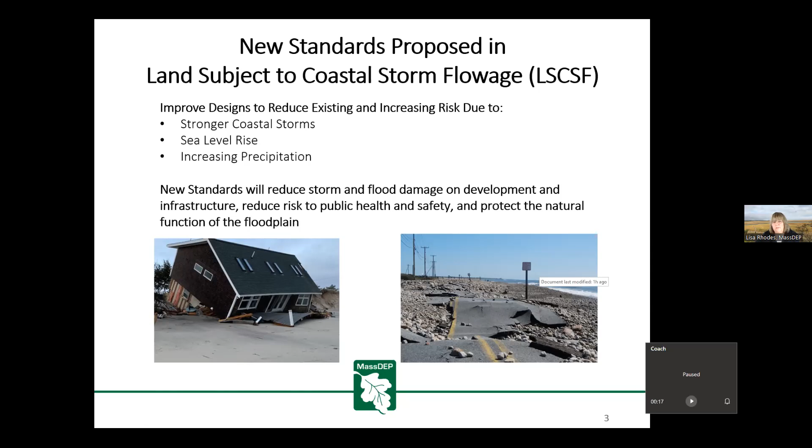And so, many of you know that we have been working on these standards for a number of years, even though land subject to coastal storm flowage has been a protected Wetlands Protection Act resource area since the very beginning. But we've never had specific standards for this resource area. And we've learned over these years that the importance of having these standards is not just for environmental reasons, but it's also important for economic reasons.

And this was highlighted in a report in Commonwealth Magazine in October of 2022, where they discussed the big three credit rating agencies, how they gave Massachusetts mostly good ratings, but noted that there's a counterweight in the state's vulnerability to coastal storms and flooding. And specifically, the S&P rating in 2022 noted that Massachusetts environmental risks were moderately negative in the credit rating analysis because of our coastal exposure.

Specifically in the combined Boston and Cape Cod area, exposing the state to significant economic disruption following a high impact event. So implementing strong and new standards in land subject to coastal storm flowage not only makes environmental sense, but it makes economic sense, for a strong Massachusetts in general.

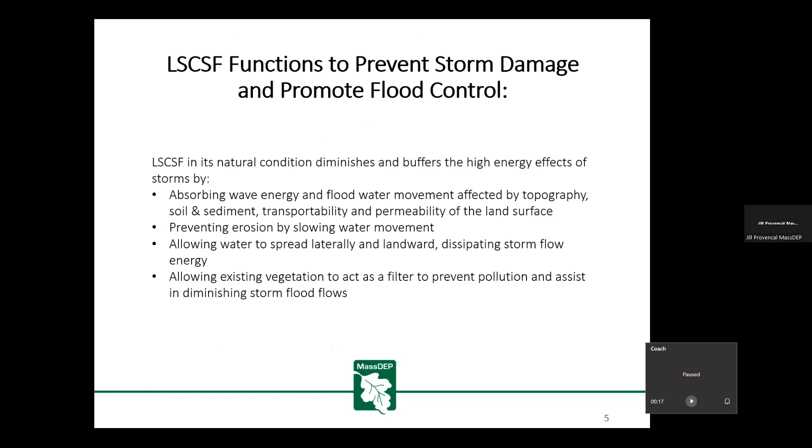So within land subject to coastal storm flowage, we have several FEMA flood zones. I think you can see my cursor. So the velocity zone, or V zone, is also known as the coastal high hazard area. And the V zone boundaries are determined by reference to the currently effective or preliminary FIRM map prepared by FEMA. These areas are subject to high velocity wave action from storms and have projected wave heights of 3 feet or greater, or at least 3 feet of runup.

Landward of the velocity zone is the MoWA, or the area of moderate wave action, also considered a high hazard area of the A zone. These areas experience wave heights between 1.5 feet and 3 feet, storm surge, and wave runup. Then landward of the MoWA is the MiWA, or area of minimal wave action, also located within the A zone. And this area is considered the lower hazard portion of the A zone and is subject to wave heights less than 1.5 feet during the 1% annual chance flood.

Then you'll see this boundary here. And this is the boundary between the MoWA and the MiWA. It's called the LiMWA, or limit of moderate wave action. Just a note that the complete up-to-date LiMWA lines are only available through the FEMA Flood Map Service Center as part of the National Flood Hazard Layer. They are not shown on MassGIS or other state viewers. And then landward of the MiWA is the X zone, and these areas are currently not located within the FEMA 1% chance floodplain.

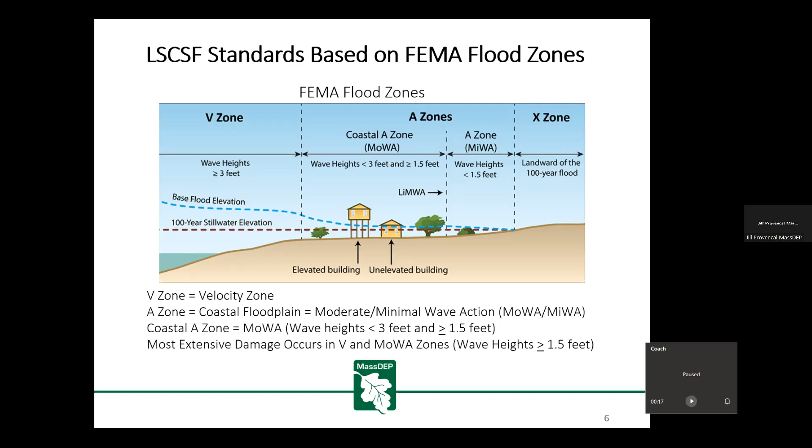So learning from past storms. Areas along the coast of Massachusetts consist primarily of protected coastal reservations, natural wetland resource areas, and rural to highly urbanized development. And in each of these areas, regardless of its present landscape, they are subject to erosion, scour, and damage from storm events.

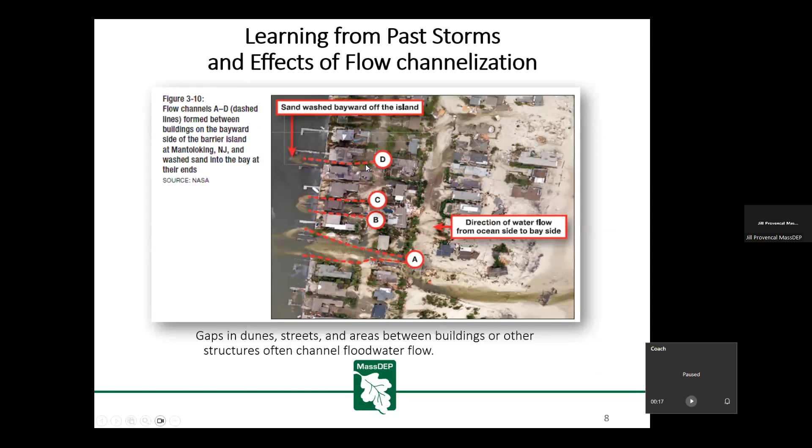So I'm going to refer back to this as I describe what we're seeing here. So in certain areas, the MAT found that flow channelization tends to be highly localized, and changes in elevation can facilitate flow channelization. So in this figure, and this is from the Hurricane Sandy MAT report, they identified flow paths A, B, C, and D. So the flow channel A, this path here, resulted in washing this house into the bay. And then flow channels B through here, C, and D, resulted in undermining foundations and causing collapses of homes.

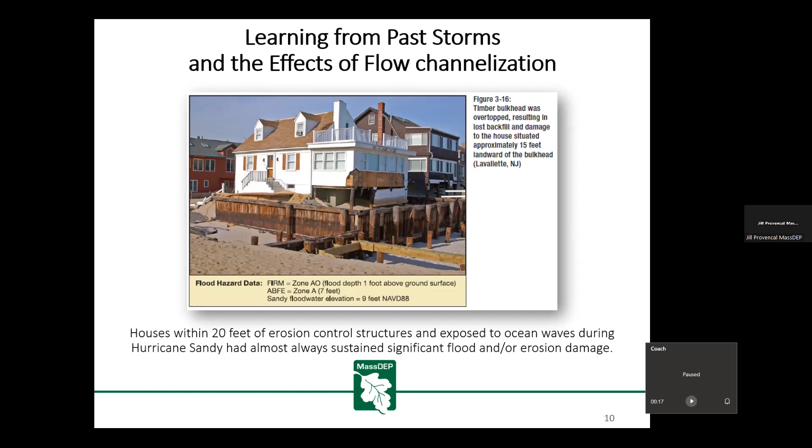The Hurricane Sandy MAT also found that buildings within 20 feet of erosion control structures exposed to ocean waves almost always sustained significant flood and/or erosion damage. Other evaluations include, but aren't limited to, this is the federal flood insurance claim map, for which we can see on the landscape areas of repetitive damage from storm events.

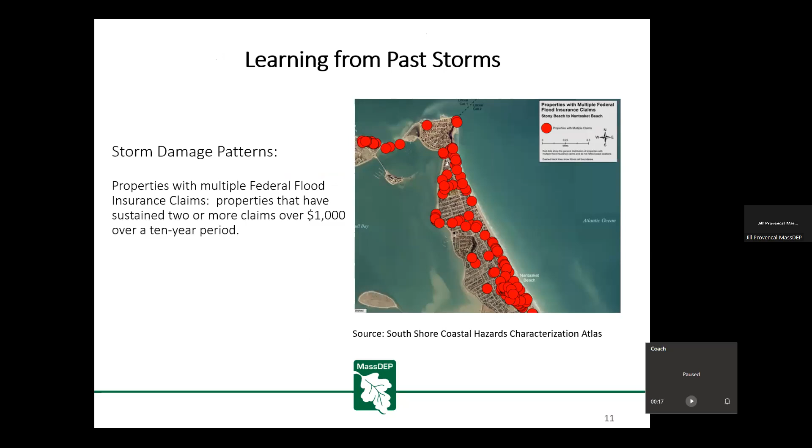So I guess for me, in closing, observations, again, including but not limited to those documented by FEMA, MassDEP, and through our Mass Coastal Storm team, who's been a little bit busy the last few weeks going out there and doing assessments, is reshaping really how we think about development and redevelopment within LSCSF.

And we are hopeful that through these draft regulations, we can utilize what we have learned and adapt and change past practices within LSCSF and focus on utilizing this resource area and other wetland resource areas to our advantage by restoring and preserving their capacity to provide storm damage prevention and flood control.

And now I'm going to pass it over to Pam Harvey. Thanks so much, Jill.

Yes, I'm going to begin with a walking tour of the proposed regulations at a very brisk pace, because we've got a lot to go through and we want to get to your questions. But I'm going to begin here with some sort of orientation to how the regulations work.

We have many people living in land subject to coastal storm flowage, businesses; there's development already there. There's new development that may be proposed. So we tried to set up the regulations in a way that was going to be relatively easy to implement. So these are some considerations to think about when you're thinking about a project or how the regulations may apply to your site or within your town, because I know many of you may be with conservation commissions.

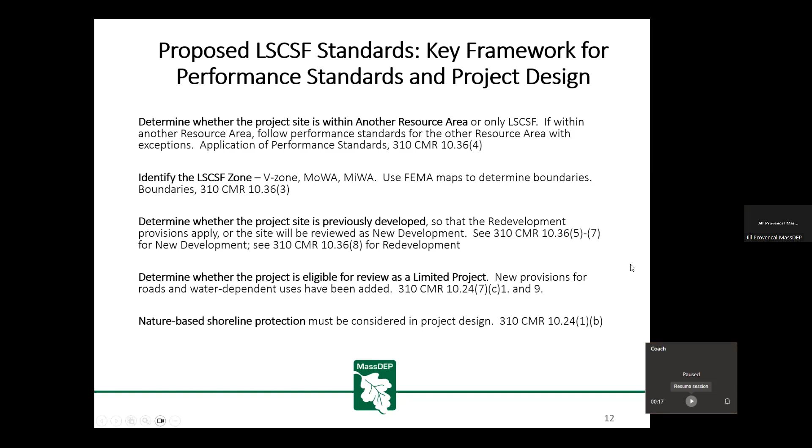Okay, all right. Turning to this central question of whether you're under the land subject to coastal storm flowage standards only, or whether there's another resource area, and how to sort that out. We're at 310 CMR 10.36 in the proposed section 4 in the proposed regulations, in case any of you have started to read them and digest them. So again, the general rule is that if it overlaps another resource area, you meet those, except for these important provisions.

There's a provision that addresses buildings: there's no new buildings in the velocity zone, even on open piles. And then in the moderate wave action zone, new buildings would have to be elevated under the land subject to coastal storm flowage standards, dune, bank, or the building code, whichever is higher. So there's a distinction there about buildings and building heights that would apply if you're in another resource area. For the moderate wave action zone, the building height would be base flood elevation plus an additional 2 feet, and there is a limited waiver clause for the additional 2 feet for very exceptional circumstances, but for the most part that will apply.

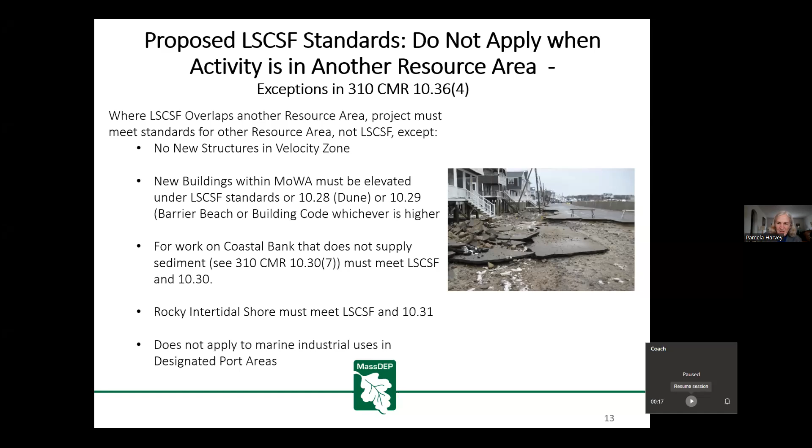And then finally, and not unimportantly, they do not apply to marine industrial uses, and that's a defined term. It's also a Chapter 91 term within designated port areas. Okay, next slide.

Okay, so just turning to the basic standards themselves. They're set up in a way that's very consistent with the other coastal resource areas, and inland areas too, with the same kind of format. There's a preamble, as you would expect, that describes some of the functions of land subject to coastal storm flowage that Jill introduced you to, the effects of development characteristics, and sets up the presumption of significance for flood control and storm damage prevention.

They're also determined to be per se significant within the velocity zone and the moderate wave action zone. Again, those are the areas of land subject to coastal flowage that are most affected by wave action and the velocity of waves coming in.

As to definitions, we've added some new terms being introduced in the land subject to coastal storm flowage regulations. It's important also to look back to the general regulations at the beginning of the regulations at 10.04, and also the coastal regulations that have their own definitions at 10.23. So you may need to look in more than one place to find definitions.

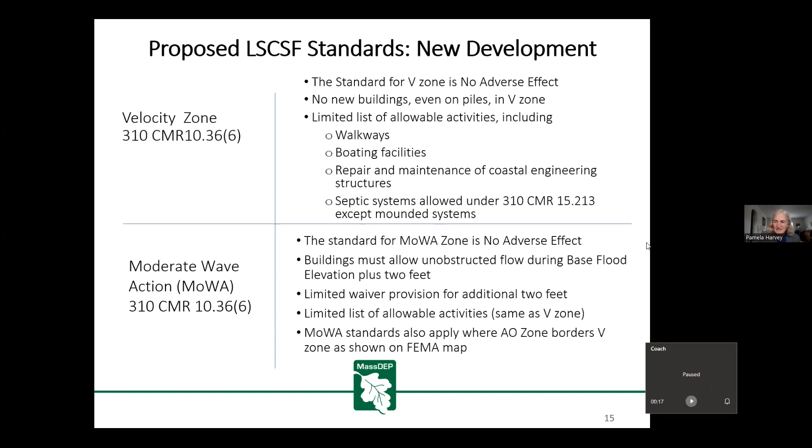Okay, turning now to the minimal wave action area. Here the standard is minimize adverse effects, and new buildings can be allowed either on open piles, again, open piles means that there's unobstructed flow beneath, or on a solid foundation. There is a provision that would allow the issuing authority, when wave energy is significant and it's within the buffer zone of another resource area, to require elevation. And then there's language in the regulations about trying to avoid alteration that would redirect or increase flooding on other properties.

There are provisions for trying to mitigate or avoid any increase in flood velocity, volume or elevation that would affect other properties, and also that would address situations where there's a confined area or basin where the flood flows; any water that went into them would be confined. So that would obviously be an adverse effect on other structures in that area.

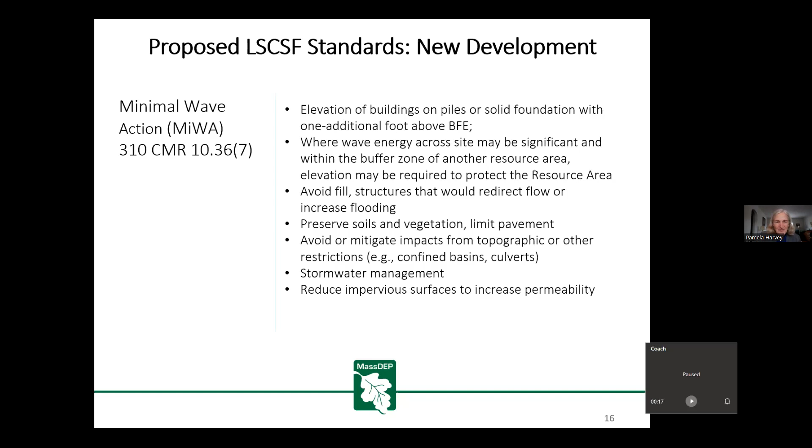And those topographic depressions would show up either on a topo map or through LiDAR. So again, that's to try to minimize effects on other properties, and also to avoid problems with impeding return flow. After a flood event, you do have return flow issues if you have confined areas. And requirements for stormwater management, and then being sure that the area stays as pervious as possible. Next slide.

Okay, turning now to redevelopment. This provision has similarities to the redevelopment standards that we have for the riverfront area. Redevelopment is defined fairly generally as replacement, rehabilitation, or expansion of existing structures, the previously developed areas, sites that have structures, fill, pavement, vertical impediments to flow. I think you probably will know these sites when you see them.

And here the basic standard is to improve existing conditions by reducing pavement, trying to remove vertical restrictions in flows, flood storage as an example. Under these provisions, stormwater management will be required, and that's actually quite an important thing, because you can end up with a lot of water just coming in from precipitation and storm events that gets added to the flooding. So stormwater management is very important, and there are different standards depending on what zone it is.

So generally, in the context of redevelopment, we want it to be landward rather than seaward on the site, not to increase the building footprint. And then there's some provisions about the V zone: no new buildings, and damage reconstruction or substantial improvement, which are both building code and FEMA defined terms, would have to be on open piles with, again, flood flows beneath them. And there's also some provisions about situations where there's damage to a foundation that would also require elevation.

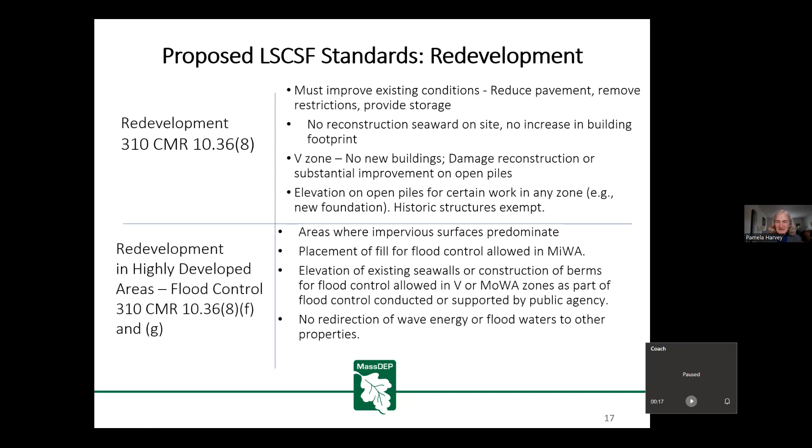And partly the support of the public agency is because it's very important with flood control, seawalls, and other continuous flood control structures. It's a collective action problem, and you really need to have continuous control. You can't just have ad hoc projects with gaps between them, because then the flood control is just not going to work. So that is redevelopment. I'm going to finish up with the next slide. Oop, no, back slide. There we go.

Okay, finishing up on land subject to coastal storm flowage. Here are two more provisions that are not unimportant. The first one is salt marsh and dune migration, and this is sort of a new thing for wetlands regulations, but it occurred to us that there may be opportunities where either salt marsh or coastal dune is adjacent to land subject to coastal storm flowage, and there may be an opportunity to allow either one to migrate, passive or assisted, into land subject to coastal storm flowage, likely if it's undeveloped. In any case, it seemed like something we should encourage, so we have a provision in the regulations that would allow that to go forward.

Again, it's sort of a new thing, but it seemed important to have that opportunity. And you may think, well, geez, if someone could have a yard and a swing set, why would they want a salt marsh in their backyard? And it's really going to be the case going forward that having salt marsh or coastal dune is not a bad thing to have, because they're going to be protecting your house or a building and other

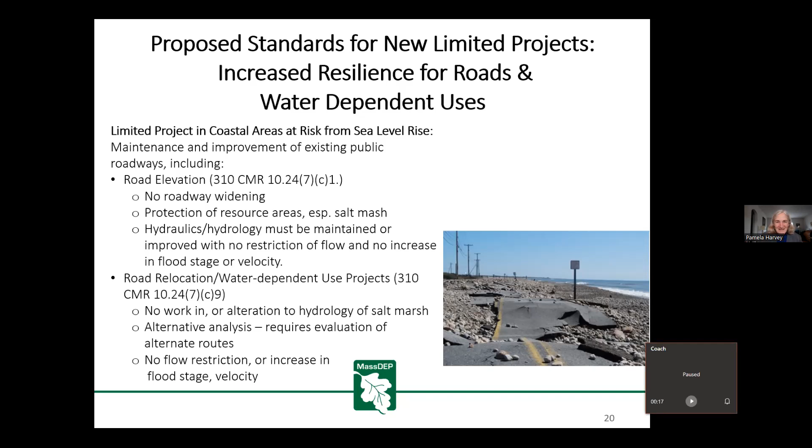Okay, yes, and last but not least, we do have a provision, a pathway for scientific research on climate resilience, and it's more in the beginning of the regulations, 310 CMR 10.05(12). It's located near the provisions for test projects for energy facilities, and it has some similarities there, but it's intended really for research that's looking specifically at the response of wetlands to climate change. And it has some limitations on its use. We tried to set it up so that it's bona fide research and will get some good information.

There are limitations on the impacts and how long the project can go on, and the ability to do restoration. So if you're interested at all in scientific research projects, have a look at those, and we'll be interested in the comments from the scientific community on those. So next slide, and I'm turning it over to Lisa.

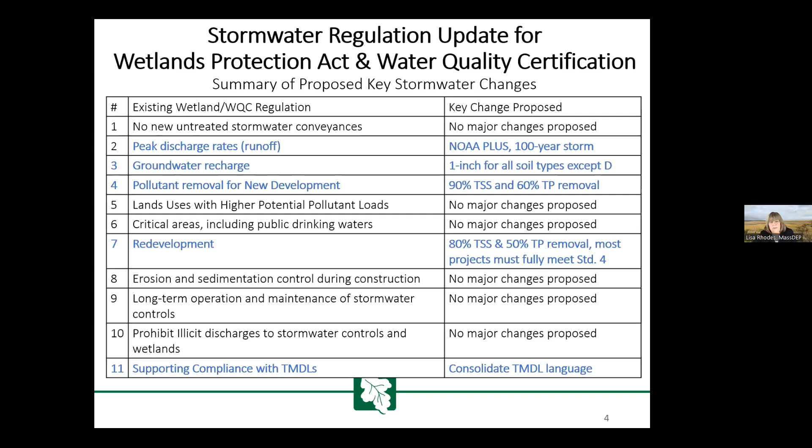Next slide, please. So this slide shows you there are 10 stormwater standards currently, and the main changes we are proposing are to standards 2, 3, 4, and 7, which are peak rate attenuation, recharge, pollutant removal, and redevelopment. And then we're proposing to add a new standard pertaining to total maximum daily loads. Next slide.

Starting with just a high level overview of standards 2, 3, and 4 as they pertain to both new development and redevelopment, which is standard 7. Starting with standard 2, the standard 2 is for peak runoff attenuation, and it requires that stormwater management systems be designed so that post-development peak discharge rates do not exceed pre-development peak discharge rates. And that standard is not going to change.

However, for the precipitation data that the standard relies on, we're proposing to discontinue use of the current 60-year-old Technical Paper 40 data that current designs are being based on, and adopt the new NOAA 14 precipitation atlas for use in stormwater design in the standard for new development and for redevelopment. Except rather than use the average or fitted value of the NOAA 14 atlas, we are proposing that designs would be based on the 90% of the published upper confidence interval to reflect currently observed extreme storms.

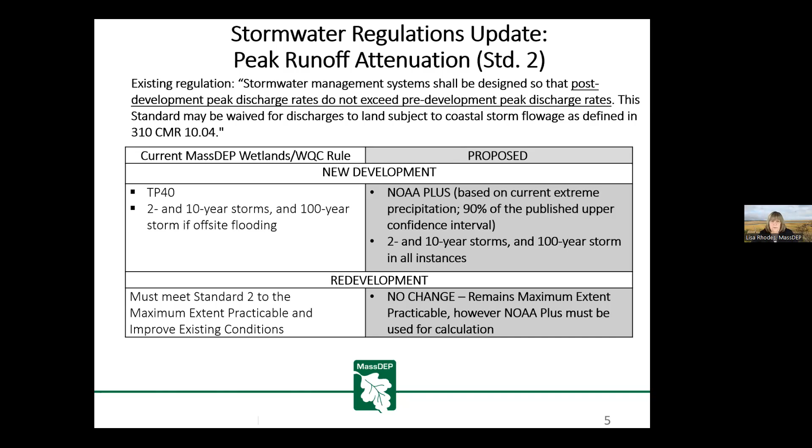So we are also proposing to continue requirement of the 2 and 10 year storm for design, and also the 100-year storm for design. For redevelopment, the current standard is maximum extent practicable, and we are proposing that the proposed standard would continue to be maximum extent practicable, except it would be based on the higher end of the NOAA standard, which we refer to as NOAA plus. So it would be NOAA plus to the maximum extent practicable for redevelopment. Next slide.

Standard 3 pertains to recharge, and it requires that systems be designed so that post-development recharge reflects pre-development recharge. And the current standard is based on soil types, so we have different standards based on whether your soil is A, B, C, or D. The proposed standard would change that and require 1 inch of recharge for A, B, and C soils if you're using the static method, and D soils would be a maximum extent practicable standard even for new development.

We are also allowing additional methods for designing that, including the dynamic method and the continuous simulation method, which would be presumed to meet the 1 inch standard. Additionally, we conducted a reevaluation of this standard as was requested by our advisory committee, and we'll be discussing that in a little detail within a few minutes.

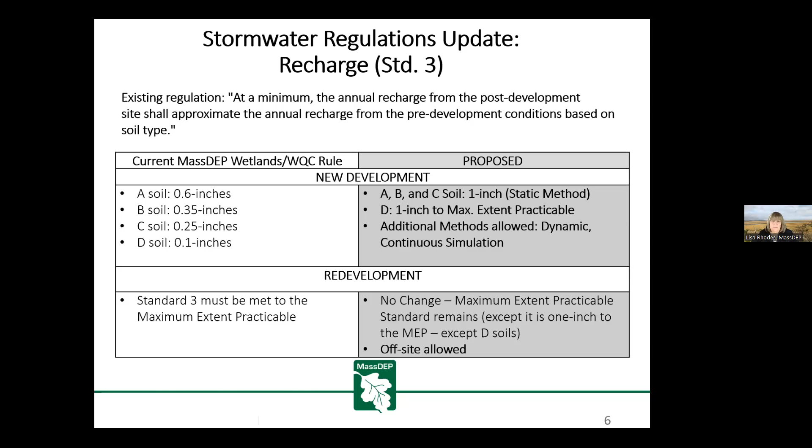For redevelopment, the recharge standard is currently maximum extent practicable, and that would remain as maximum extent practicable, except it would be maximum extent practicable of 1 inch. And we are also proposing to allow off-site mitigation for redevelopment. Next slide.

The next slide is standard 4, which is the pollutant removal standard. And this standard currently requires removal of 80% of the average annual load of total suspended solids. And this was the most important standard to try to align with the EPA MS4 general permit.

And so our proposal is to require removal of 90% total suspended solids and 60% total phosphorus for new development, similar to EPA, only we are proposing not to allow off-site mitigation because new development would be on new sites and could be designed appropriately to meet this.

For redevelopment, we're also proposing to align that with EPA in requiring 80% total suspended solids removal and 50% total phosphorus removal. Only that the proposal is for redevelopment to meet this standard rather than to meet it to the maximum extent practicable. We do have exceptions to this requirement, and we've added a few additional exceptions to this requirement,

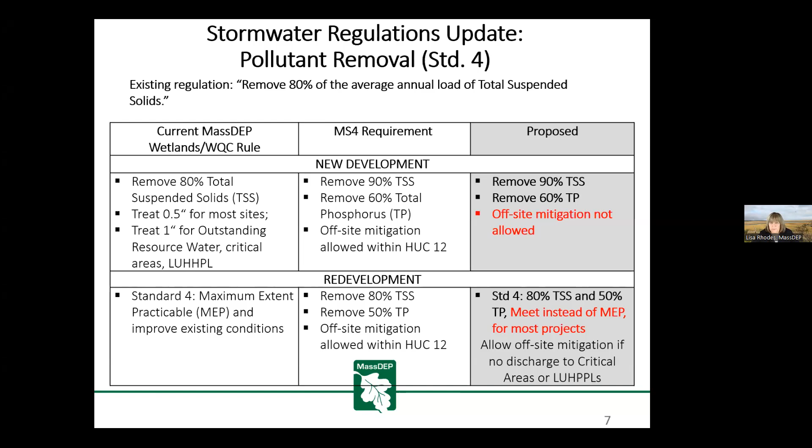Next slide. I think we will now move on to a slightly deeper dive on standards 2, 3, 4, and 7 now. So I'm going to turn it over to Tom McGuire, MassDEP's Climate Resilience Coordinator and longtime stormwater guru. Tom? Thanks, Lisa. As Lisa indicated before, we're currently relying on Technical Paper 40, which was published in 1961.

So it's over 60 years old. It's basically a paper map with like 2 or 3 isohyets, or lines of equal precipitation, that go through Massachusetts. So it's very coarse. We're proposing to replace it with NOAA 14, which is a web-based interface. You can get precipitation statistics for any point in the state. We're proposing to use an additional increment above that, which we refer to as NOAA Plus, which is based on the range of variability we see in actual storms.

Next slide, please. So this shows you how you would get NOAA Plus. When you point and click on any spot in Massachusetts, it generates this table. So the black bolded value is the fitted value, and then underneath in parentheses is the lower confidence to the upper confidence. So we're proposing that parties use the upper confidence interval times 0.9, which reduces that value by 10%. And that's the value you would use for design. So this reflects the range of variability we're actually seeing in storms. Next slide, please.

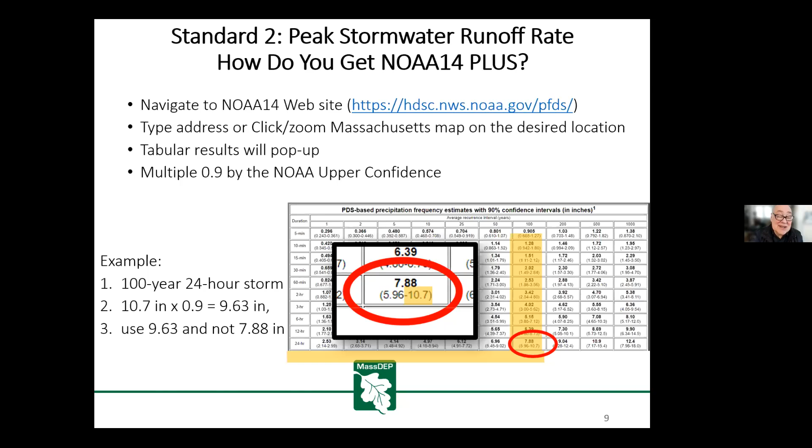We're also proposing to make the same change to BLSF. Right now, in the absence of FEMA data, it's the largest event observed or recorded, or in the event of a conflict, an engineering analysis using a 7-inch storm in 24 hours. In a lot of cases in Massachusetts now, the 100-year storm is like 8 to 9 inches. So we would use NOAA Plus for consistency with stormwater. And then I hand it over to Dave Roman.

Okay, thanks, Tom. So now moving on to standard 3, which is focused on recharge. So the current standards, the recharge depths, are based on the hydrologic soil group. So for example, for the static method for group A, the recharge depth is 0.6 inches. For soil group D, it's 0.1 inches. The proposed standard is for the recharge depth to be 1 inch for all soil types except for D. And there are a couple of ways to lower this amount using the dynamic methods.

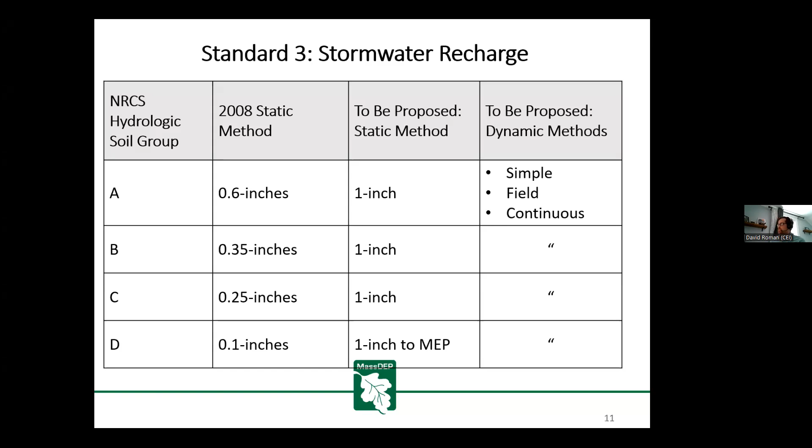So dynamic sizing can essentially result in smaller SCMs, or stormwater control measures, than static sizing because it considers the saturated hydraulic conductivity. So there's a couple of different methods already available in the handbook. That's the simple dynamic and the dynamic field method. The proposed handbook has a new dynamic method called the continuous simulation method. And this method looks at long-term rainfall records near the site to come up with a dynamic sizing.

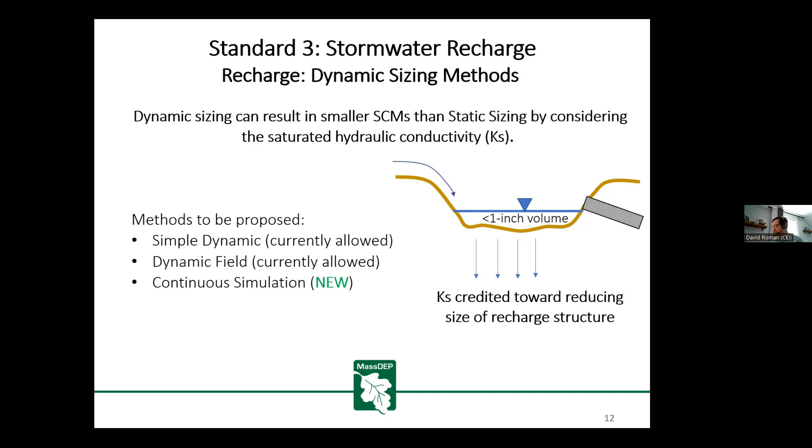One thing to note is MassDEP did look at this 1 inch target based on some comments from the advisory committee. So there were a couple of analyses that were done. One was a base flow separation analysis, and one was a continuous rainfall simulation analysis. So kind of two separate methods to try to look at this. And really the whole goal of recharge is to approximate predevelopment conditions.

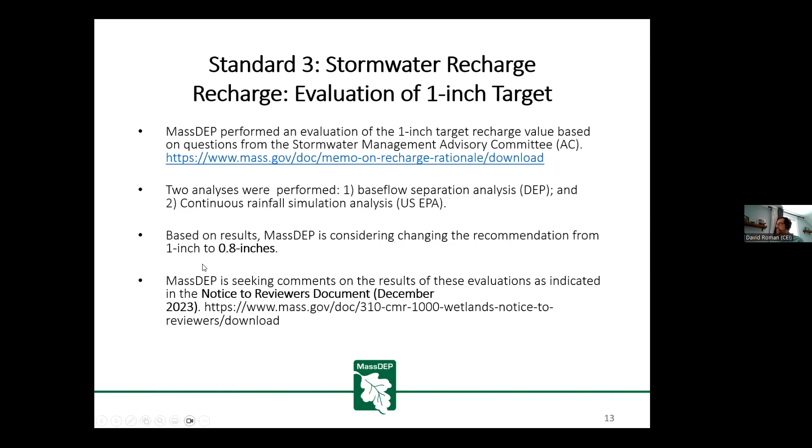So based on the results of this analysis, DEP is considering changing that recommendation for the static recharge depth from 1 inch to 0.8 inches. So there is a request for comments for this in the notice to reviewers document. So MassDEP is welcoming comments on this. And the link is right down here at the bottom of the slide. And I will hand it over to Liz to talk about Standard 4.

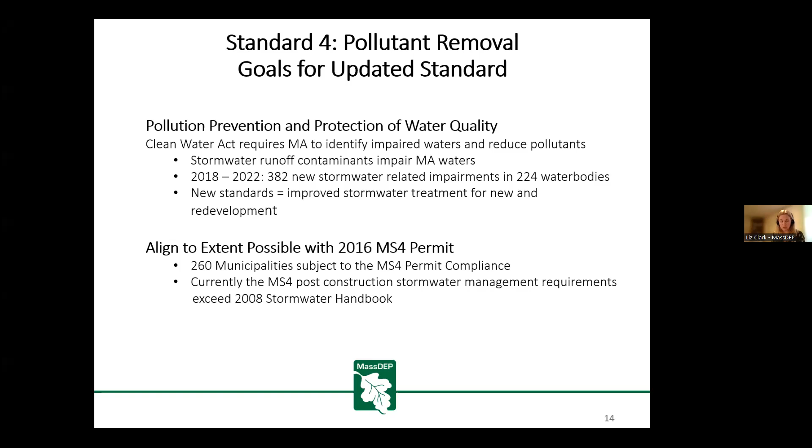and redeveloped sites. Additionally, about 74% of the towns and municipalities in the Commonwealth are subject to the MS4 permit, which have a higher level of post-construction stormwater management requirements. So the goal was to align to the extent possible with the 2016 MS4 permit. Next slide.

So what has changed? The current standard is based upon total suspended solids removal, getting rid of your particulates, your floatables in your stormwater. So requiring 80% average TSS removal on your new projects, and then 80% TSS removal to the maximum extent practical on your redevelopment projects. The standard is moving to increase the TSS removal requirements for new projects to 90%. And in addition, we're now considering nutrient removal as well.

So 60% total annual phosphorus removal is required on new projects. And for redevelopments, it is going to 50% total phosphorus removal. With redevelopment projects, the standard previously was maximum extent practicable. We are moving to a fully meets for redevelopment. In the event that you cannot meet these standards on site, there is the option to consider off-site mitigation if you're not a LUHPPL or discharging to a critical area.

You'd have to first submit an alternatives analysis demonstrating the hardships that don't allow you to meet the treatment on site, and then you can start evaluating your off-site options, starting close to your site and moving out, looking maybe on the same project site or within the same project locus to begin with, then stepping back and evaluating the same wetland system, then potentially an adjacent site, the same municipality, and then looking at the same HUC 12 or Hydrologic Unit 12 subwatershed. And those watersheds are available on MassMapper if you'd like to see them. Next slide.

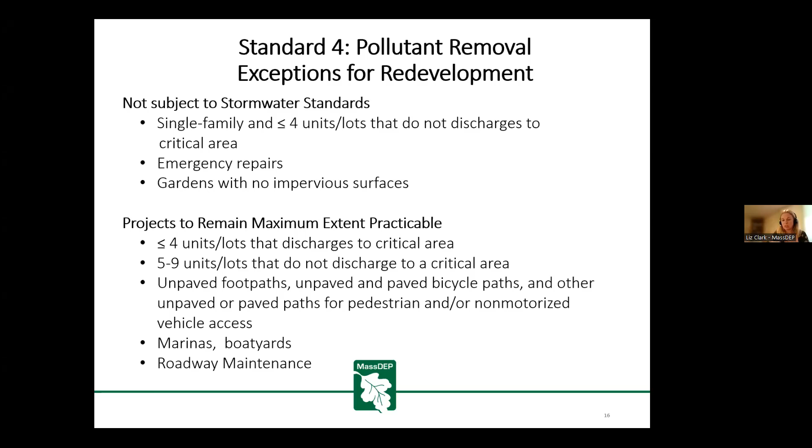Projects that still can remain in that maximum extent practicable category are single-family developments of 4 or less units or lots that discharge to a critical area, single-family developments of 5 to 9 units or lots that do not discharge to a critical area, unpaved paths, multi-use paths, bike paths, anything that's not subject to regular vehicular traffic, marinas, boatyards, and roadway maintenance. Next slide.

So there's 3 options listed in the handbook to calculate the pollutant removal credits and how you comply. On table 2-2, there is a stormwater control crosswalk, and this is going to tell you your methodology on how you're looking at this. So starting with option 1, all projects are required to evaluate and implement environmental sensitive site design credits, and we'll go over that in just a few minutes. If you cannot use the ESSD credits, you do have to submit an alternatives analysis demonstrating why you cannot.

And then you can move into these other sizing methods, which is the EPA performance curves, which have now been added into Appendix B of the Stormwater Handbook. These are the curves that were included in Appendix F of the MS4 permit. I'm sure a lot of you are very familiar with them, and they can help you size your stormwater control measures so that you're meeting the targets of the 90% total suspended solids removal and the 60% phosphorus load reductions.

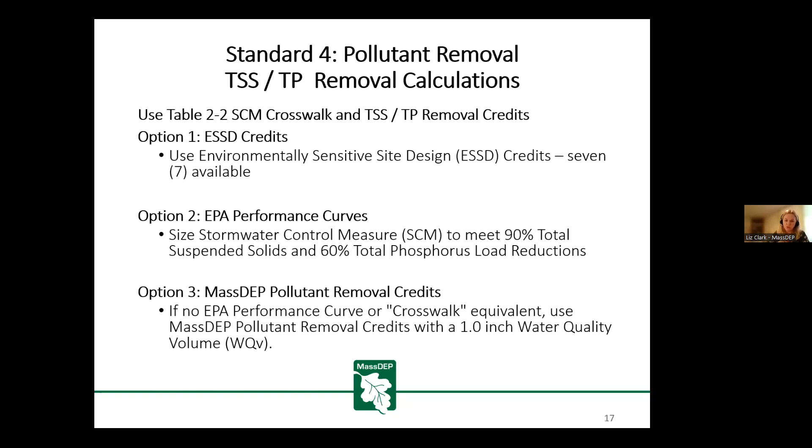And if there isn't a performance curve, you'll be defaulting back to the MassDEP pollutant removal rates, such as getting 25% TSS removal for a catch basin. Next slide. So this is an example of the EPA performance curves. The dark blue line here is our total suspended solids removal. The darker orange line is the total phosphorus removal.

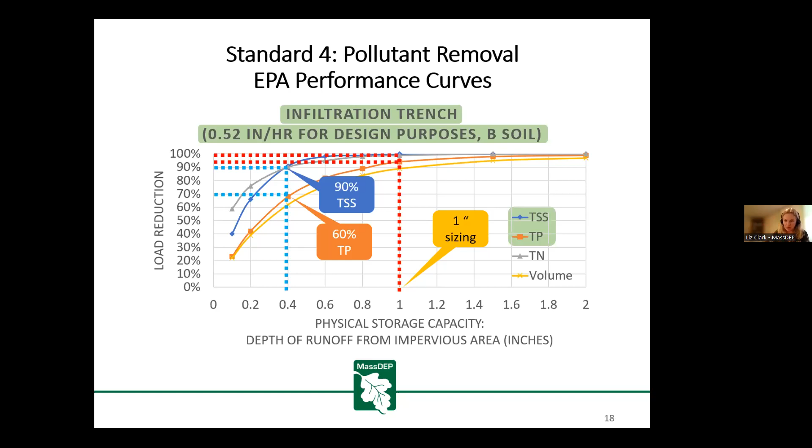These charts are very handy also for helping you identify your efficient points on your BMPs, or SCMs, sorry, when you are really hitting your maximum pollutant removals and at what depth. Next slide.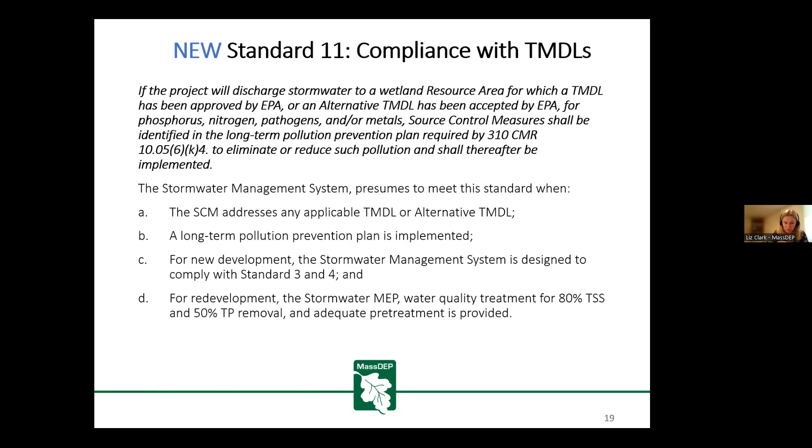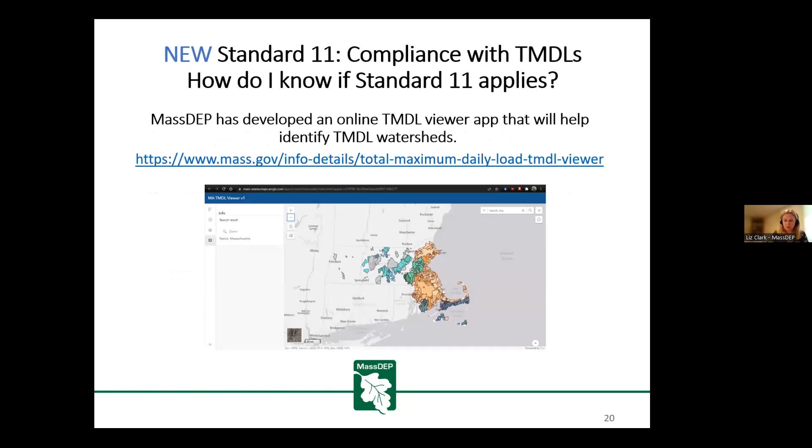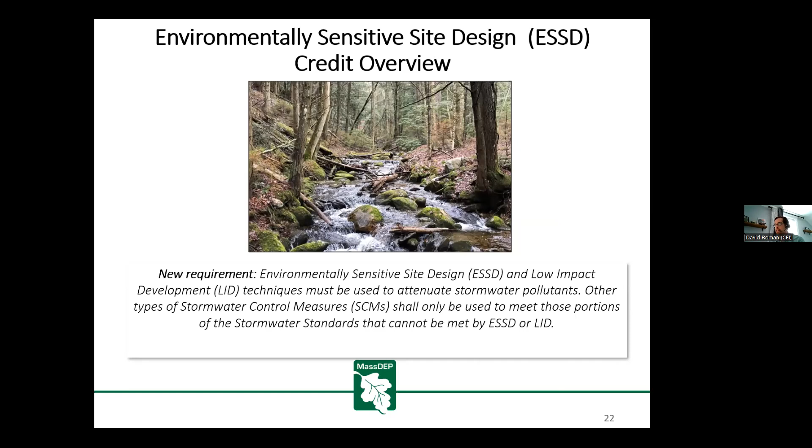Okay, thanks, Liz. So as Liz mentioned, the proposed handbook has a couple of new environmentally sensitive site design credits. And that's because there is a new requirement in there that environmentally sensitive site design and LID techniques must be used to attenuate stormwater pollutants. So one example of that is to use ESSD to meet the recharge standard and the pollutant removal standards. So to help applicants meet this requirement, the ESSD credits were updated and added.

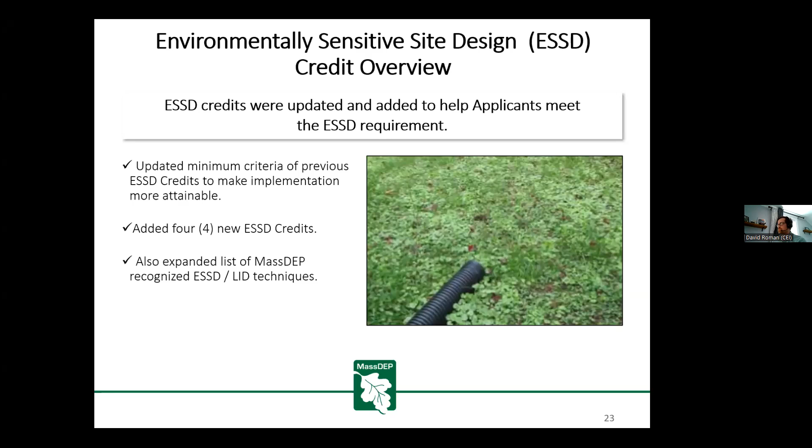So the first credit was in the 2008 handbook, and this is really just for general ESSD to encourage minimization of impervious surfaces. There's a new credit for solar projects. Credits 3 and 4 were also in the 2008 handbook, and this is really about disconnection of impervious surface to a qualifying pervious area, such as a meadow area.

There's a new credit that encourages use of tree canopies, and the whole idea here is that you can reduce the effective impervious cover that must be treated to meet standards 3 and 4. So the idea here would be to essentially account for the amount of canopy that overhangs onto impervious surface. And there is some information in there about using new trees versus existing mature trees.

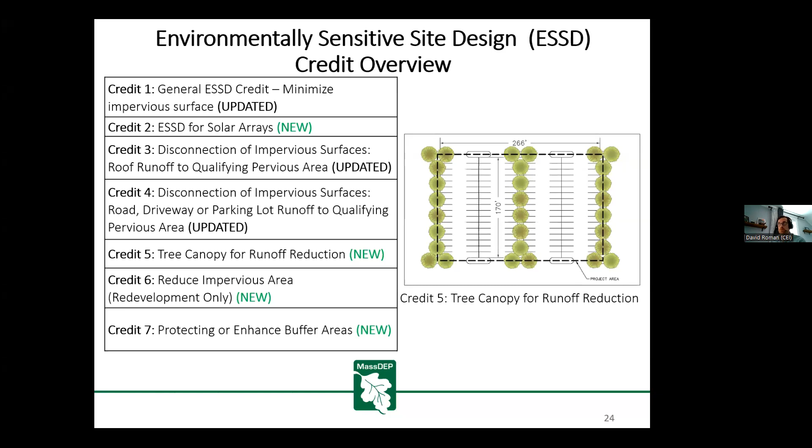Credit 6 is for redevelopment projects. So that's encouraging reduction of impervious area. And then there's a new credit for buffer areas, so essentially encouraging sheet flow from certain impervious areas into buffers. This can be existing buffers or new buffers.

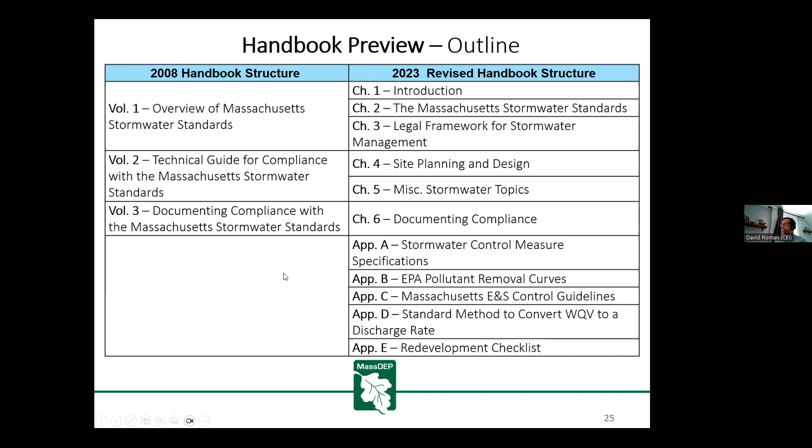It's just now everything is in chapters, and there are appendices at the end. So for example, the 2008 handbook has the BMP fact sheets in volume 2. Now all that stuff is just at the very end, and they're now called stormwater control measures.

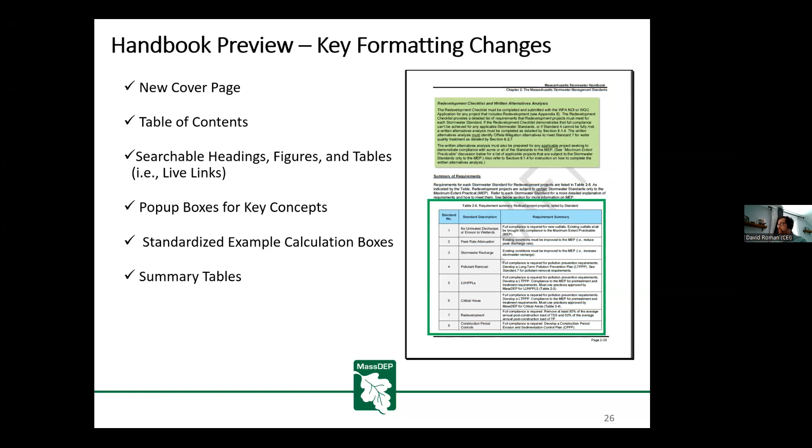There are standardized calculation boxes to give examples of how to do various calcs in the handbook, summary tables to kind of help make the information easy to find. Everything's been reformatted, so the old BMP specifications have kind of had an overhaul.

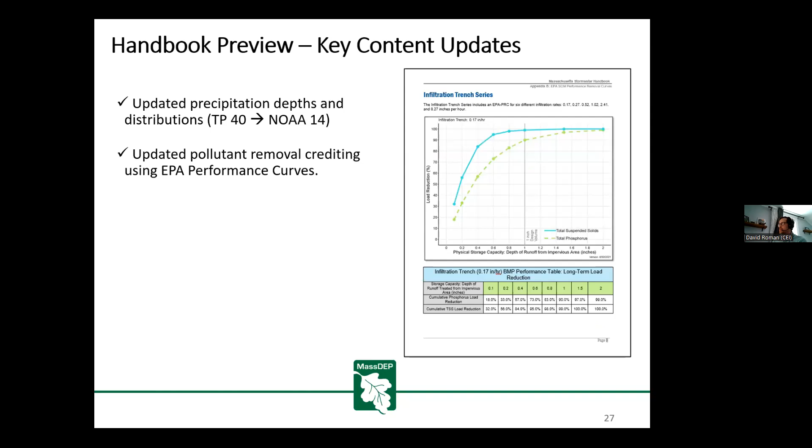And then just a couple other things that have been mentioned today. More information on the alternatives analysis framework. There is information on how redevelopment projects can use offsite mitigation. Just more information on content to include in some of the required plans. So the construction plan, the long-term pollution plan, and the O&M plan.

Some other miscellaneous things. There's a new setback table. So as opposed to kind of having setbacks scattered all over the handbook, it's all in one place. There's a chapter on solar projects and a chapter on highway considerations. And I'll turn it back over to Lisa.

Thanks, Dave, and the rest of the team. This is our schedule: as you know, we have 2 more info sessions. One is tonight at 6 and one is on the 23rd at 1. We encourage you to come to those if you continue to have questions. And then we have a series of hearings where we take comment on January 31st and February 1st.